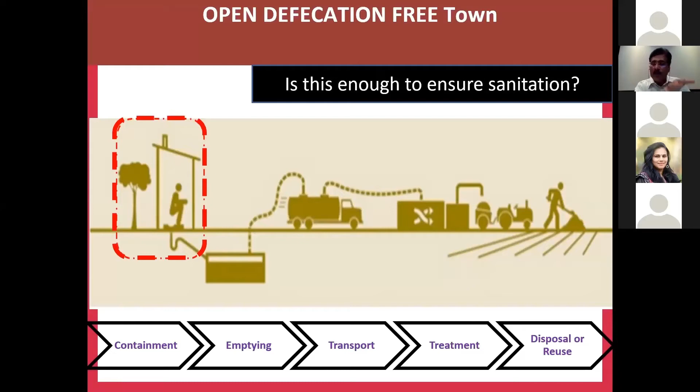That's how we can say urban India is almost, I won't say 100%, almost open defecation free. Now, globally, this is not safe sanitation alone. This is not good enough, even from a public health standpoint. Because while we have taken the right step, the first step, we need to go beyond. To get safe sanitation and to get public health benefits, we need to look at fecal sludge and septage management, which is beyond toilet provision.

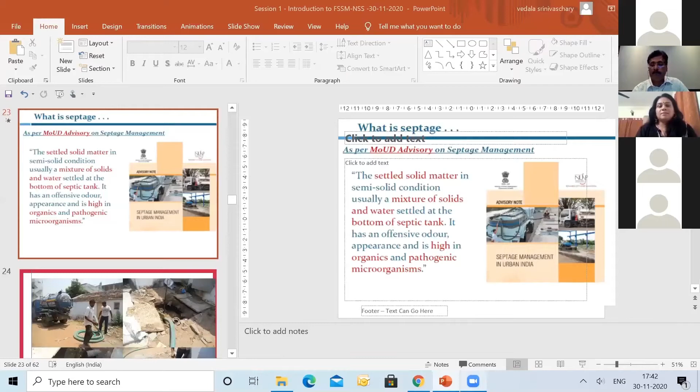Professor Charan, just one point. Time check, you have only 20 minutes left. And there was a question I wanted to flag before you go forward, by Mr. Nagesh Babu. His statement is, if both the government investment or individual spending on safe sanitation and non-sewer sanitation systems respectively be termed as public money, then both the systems may cost almost equal. Would you like to comment on that?

Yes, in a way, I agree with you. If individual households are spending 15,000, 20,000 on septic tanks, and I aggregate all that, probably we can get a sewerage system. It's price competitive, but water availability is an issue in the case of sewerage system. Operation and maintenance is very, very high. You need the right kind of human capital to run the sewerage system.

I agree to the extent, Mr. Nagesh, that if I aggregate part of the capital cost individually spent on septic tanks and channelize it to the government, probably we can get a sewerage system. There are studies available on this comparative analysis. But operation and maintenance, availability of water, and requirement for skilled human resources make it more complex and challenging. So if I take the life cycle cost, capital and O&M, sewerage would definitely be expensive.

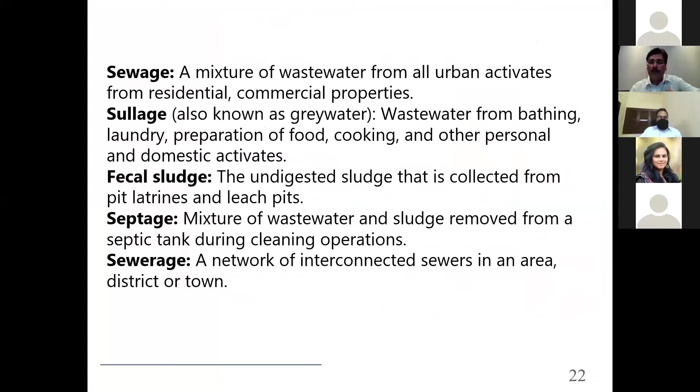These are basically starting points, but it's important to clarify. What we discussed so far is a comparison of sewerage and non-sewerage systems in the context of delivering safe sanitation, where one option is an on-site or non-sewer sanitation system. Here I am amplifying the definition of septage. It is important because our actions are guided by public health, because septage is high in organics and pathogenic microorganisms.

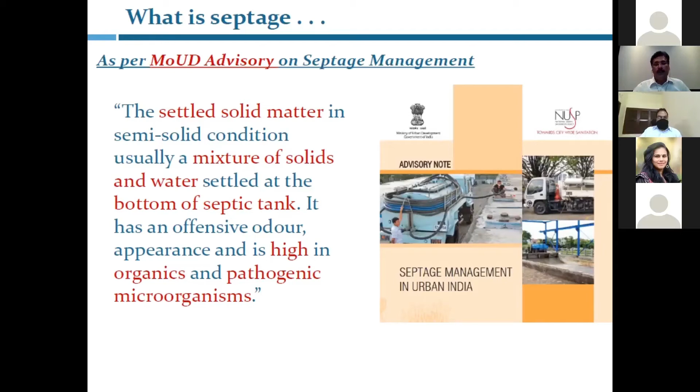It has a lot of pathogens. Hence, we need to take care of both in terms of collection system, safe collection system, and safe disposal practices. If we don't combine those, then that option is no longer safe.

Swachh Bharat Mission mein toilets bana diya, but unless and until we have downstream activities like safe collection, safe evacuation, safe transportation, and safe treatment, safety is not ensured. Safe sanitation is not ensured. So that's why we are having this conversation.

We need to take benefit of Swachh Bharat Mission. We need to take benefit of this on-site sanitation system by plugging in what is called fecal sludge and septage management practices in the system. And it is very, very cost effective, very, very easy to do. And if you don't do that, this is a very interesting diagram. I will not bore you with all this.

This is called SFD. The full form is shit flow diagram. Globally, it is now used. We may have 99% of toilets, 100% ODF in a city. As you can see here, the city has community toilets and individual household toilets, completely safe in terms of open defecation free. But still, the city will have a serious public health concern.

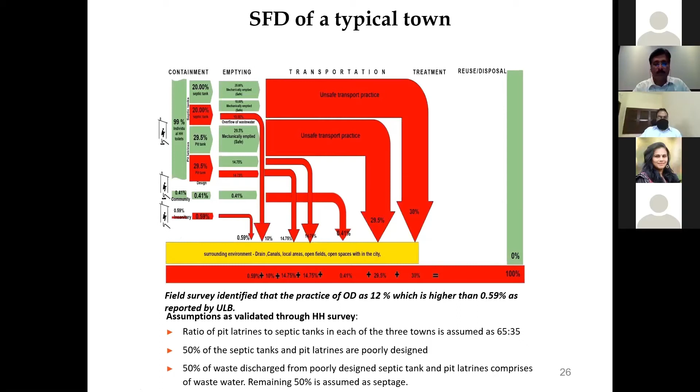So, poll, goal 3, just to break the monotony. I have only 15 minutes. So BOD is biological oxygen demand. It is an indicator of pollution. So what could be the BOD of septage, which is collected from the septic tanks and taken out periodically?

Okay, so I will be ending the poll because of the time constraint. Majority of them said 250 milligrams per liter. I will stop share results and exit.

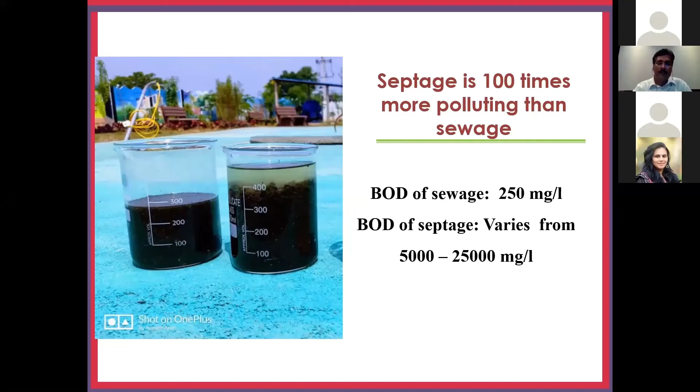Sewage ka typical BOD levels are 250 milligrams per liter. BOD of septage is in the order of 5,000 and even more. There are instances of 20,000, 25,000. So what it means is, if this truck is carrying this, and I measure the waste characteristics of this, it will be in the order of 5,000 to 25,000.

And this nasty waste is going into a water body, which eventually gets connected to a sump storage tank. Indirectly, it is creating a public health problem. So the point I'm making is, this fecal sludge and septage is pretty nasty in terms of pollution potential of rivers as well as pathogen content. It has a very high pathogen content. So that is the reason we have to be very, very alert about it.

And the other day I also mentioned, if we don't manage it well, it can also cause deaths because of the indiscriminate evacuation or cleaning of these septic tanks.

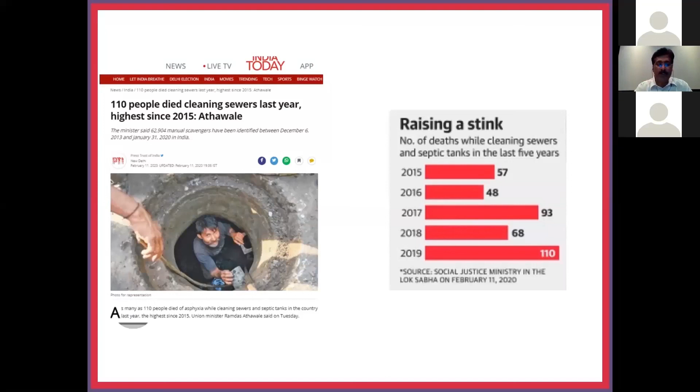Hence, Government of India is now promoting, to bring safe sanitation into the picture, what is called ODF++, which looks not only at the provision of the toilet, but also safe containment, safe transportation, safe disposal and recycling, and probably reuse. This whole chain is called the sanitation service chain or sanitation value chain, and that is the definition of ODF++.

Many of you are already ODF++. But it's just a quick recap. So why are we doing it? Basically to get what is called safe sanitation, for improving public health.